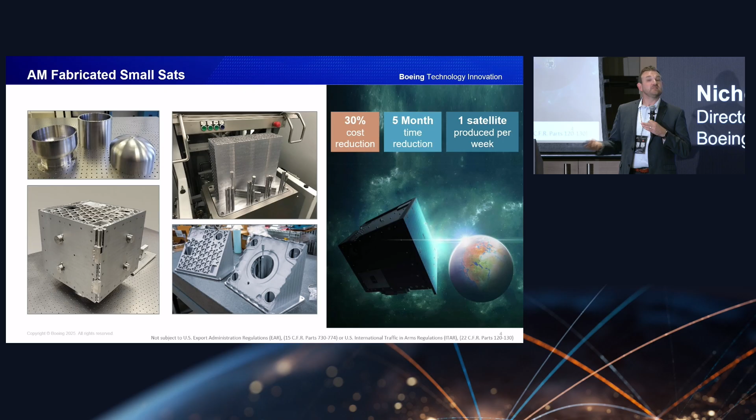And building on this success across different areas of the business, we want to continue to use the technology, and it's going to vary by business unit. This is a very specific set of needs enabled a product line. On the defense side, you have sustainability issues you need to solve and resolve from spares and repairs. And similarly on commercial, we have a broad portfolio where we're trying to adopt additive.

So an example now on, call it a spare and repair side. This is an exciting project. It's been ongoing. It's an F/A-18 landing gear bell crank. When you hear landing gear, the criticality is increased. It's an important application. We partnered with NAVAIR from day one just to go through our process beginning to end. Understand how we develop a process, how we qualify a powder, how we qualify a machine, how we generate data to say it's aerospace ready and it's meeting requirements.

This particular material was, it's really replacing a long lead forging, and it's using a high strength aluminum material that we developed that not only just fits the requirements of this part, but also has inherent corrosion resistance improvement. So it has a 50x improvement on corrosion. So it's really, from a performance standpoint, we're hitting all the technical airworthiness requirements.

So last year we had a fit check at an air station just to prove out the concept, and continuing to drive forward these types of applications where it's no longer a technical issue. We can meet requirements, we have stable processes. But how we drive value into these programs by building confidence to the end users, working with our regulators on detailed reviews on maturity so that we can really solve some of these needs.

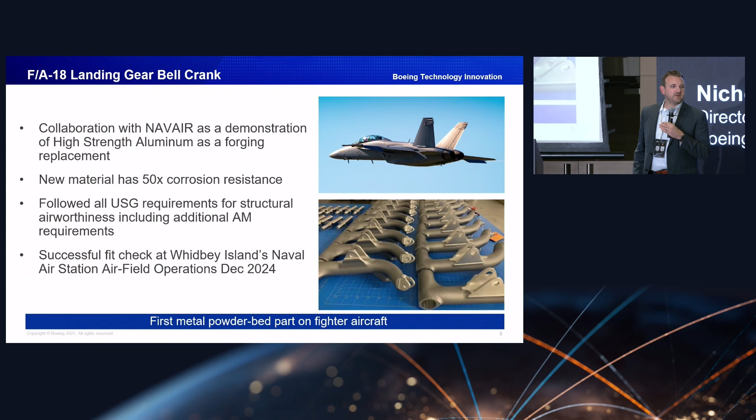So I kind of highlighted this a bit and from the sheer volume over the years, but as we're starting to scale additive now, we're going from tens to hundreds to thousands a year. What we really need to do is take a very complex interdependent process. Many variables for powder bed, easily can be over 100 variables that you have to lock down and control, especially in aerospace, aerospace mindset. Without those understood and locked in, you're not demonstrating a repeatable, reliable process, which is foundation for any regulator.

You can demonstrate repeatability in your process. So the key to scaling and developing a supply chain is a digital thread technology and system behind it, as well as a model and a supply chain to help us scale in the ways that we think we need to be successful.

So one aspect of that is developing a digital thread. That's where we're looking at a number of activities. One, beginning to end, all of the engineering data, all the manufacturing data, all the inspection data that you might need is developing a back-end infrastructure to store that. So what that has meant is we have developed an entire data architecture where we've automated our machines, connected them to a central database, integrated them with engineering and manufacturing systems. So you have data that has context. So you have a giant structured data set, and that can scale.

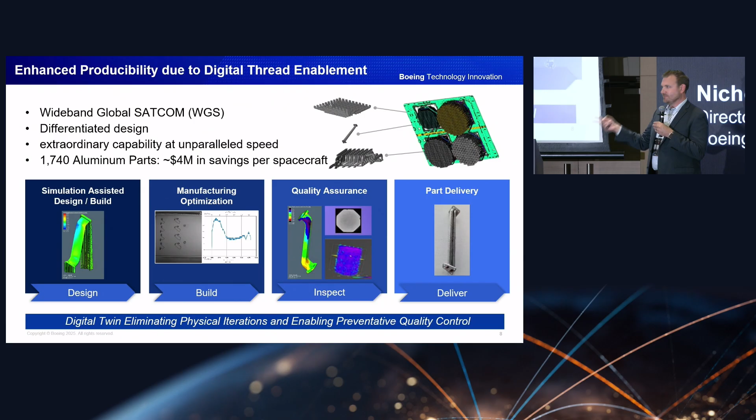Integrating machine data with inspection data and integrating it all together in one reference frame. My machine did one change here. Did it show up on inspection data? Structured data lets you do all this. So the back end is helping us scale.

And so we look at build file development and the design for additive as upfront engineering. You want to lock down your build file, your orientation, your configuration, all the developed parameters, and just lock it down, and then encrypt it, send it to a qualified printer. Now that printer can be anywhere around the world where it's needed. And you're limiting opportunity for variability by doing so.

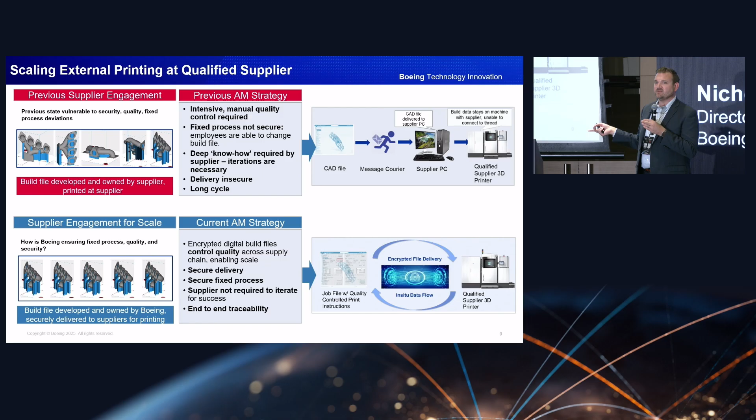All right, so you physically have a site with all the equipment. You have the ability to send it encrypted and get data back, and that's a key functionality we have, where now the data is connecting back to your digital thread. So you have a fleet of machines across the world. They're all fully connected, and you're able to integrate that in one central database, which is really an enabling piece for us to scale at quality, where you have these complex processes.

So when you're looking at that kind of complexity here, and what does that mean in the future, where we are today, and just maybe to highlight this as I wrap up my thoughts for the next session, right now we know how to qualify parts today. We have certain standards across the industry. We have very proven methods, whether it's with the DoD or the FAA, where data needs to be presented and them accepting it. The digital thread helps us scale because the data is available and accessible.

Something I have to juggle is we have to meet regulations today with data, but we also want to develop new methods of the future so we can be more efficient as we scale. So part of the enabler for the digital thread is being able to develop more complex ways of qualifying parts, where there's a lot of excellent research in the community here and also at large to advance laser controls in your machine, being able to do feedback loops to be able to control a machine using novel algorithms.

We're using machine learning and AI to control the systems. All very important work, but it has to be in the construct of how are you going to certify that part in an aerospace environment.

So the digital thread in our distributed model will help us scale with proven methods today for qualification. But keep in mind, there's future ways that we need to keep working together to scale further and more efficiently. And we have to keep working both solutions. Yeah, we know it works today, but we have to keep our eye on the future and how to do it.

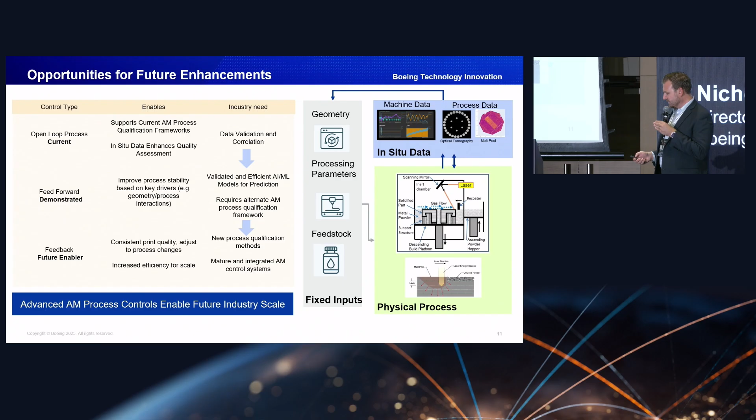So, I think with that, I just wanted to say thank you all for the opportunity. And really, I think what we're at as an industry is an inflection point, as I said, scaling up in production, and how do we leverage modern digital tools, secure transmission, digital technologies to help scale additive to the next level where we're trying to go.

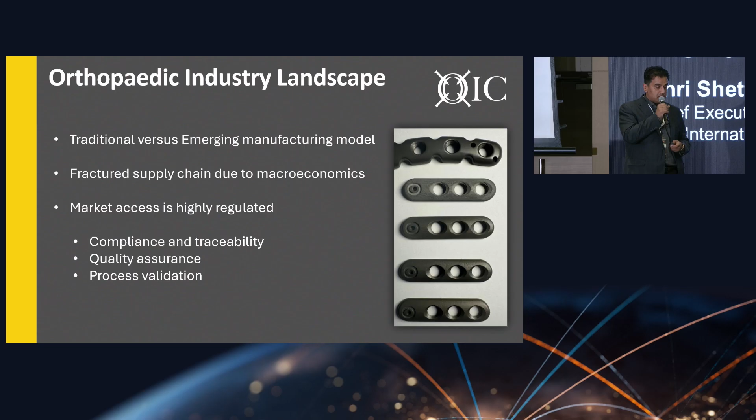The impact of additive manufacturing is that, like my previous speaker at Boeing said, you can take things that are done by 10 different vendors with different steps and integrate them in one 3D printing step that lets you replace large casting houses, large post-processing houses in Asia with a digital factory that has a much smaller footprint, and that helps you reduce costs exponentially.

So, as many of you know, the main advantage of additive manufacturing is threefold. One is the localization aspect. It is almost impossible for many countries in the world, like Indonesia and India, to put large casting houses there. They just don't have the space to do it. It's easier to put a digital factory in country.

The second is cost. Today, a lot of cost in building parts does not exist in the manufacturing itself. A lot of cost is actually in the shipping, in the inventory, in the tariffs. So if you can have a factory close to the source that is using the products, you can exponentially bring down the price, and the only way to do that is with digital manufacturing using 3D printing.

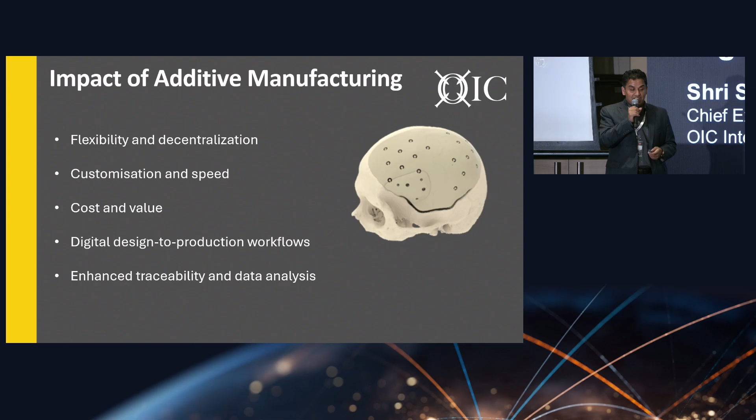The third thing is customization. You can take devices that are historically designed for different anatomies and convert them to have better fit in different regional body types. Today, it is a well-known fact that in the West, surgical procedures have really good outcomes, but when you take those devices and put them in patients in Indonesia and India, the revision surgeries, the infections, the fit issues are huge. And using 3D printing to make better fitting devices at lower price is the only way to tackle this huge problem.

So if you look at the supply chain for a medical device, from an idea all the way to a product that goes in the human body, there are maybe 20, 25 steps. And this is done by many, many vendors in the chain. At OIC, we integrate all these steps on a common platform, and by partnering with local healthcare partners, we bring it into countries. And by having this ecosystem local in Indonesia, in Singapore, in India, we are able to create the next generation of medical devices that have not been possible in the past.

Because historically, medical devices were created in the West and sold in the East. By bringing this innovation, manufacturing, development, and regulatory platform in the region, we are able to have local products created for the local population, which is very critical as the population starts aging and growing in the developing countries.

AI plays a pretty significant role in this as well. Historically, designing products has been a pretty complex and long process. It could take you anywhere from 1 month to 6 months to design a product. A lot of the AI tools help you cut the time down and help you get designs that are much more robust than anything that you could make in the past. The second thing is modeling and simulation.

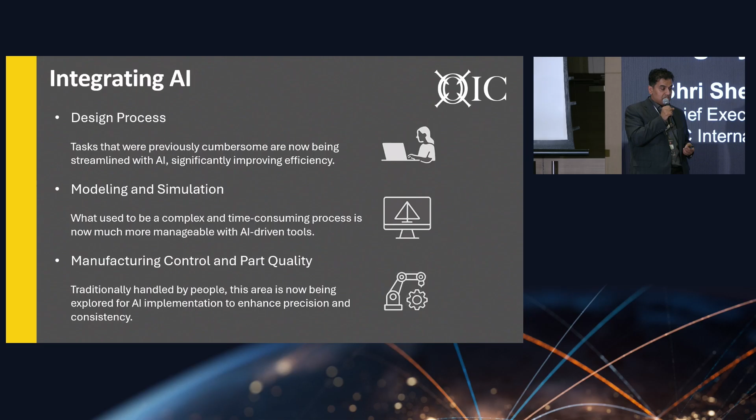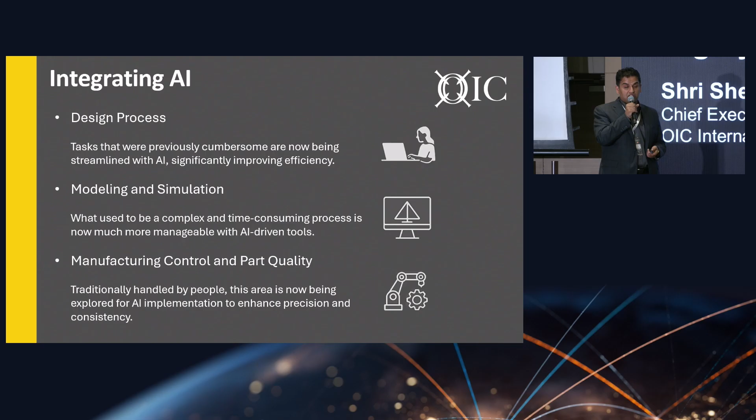And the last thing is manufacturing control. Historically, the methods used in traditional manufacturing have got to do with SPC charts, creating, looking at data, and trying to figure out how to build these parts correctly. AI helps you do this a lot more effectively, which in turn leads to higher yields and lower price. So you can get better design products, better fitting products, stronger products with much higher yields and lower cost by combining digital technologies with AI.

So in my last slide, I'll say that it is very, very critical that orthopedics goes a certain way because it's one of the basic needs of the developing countries. And we need to think about these models differently than we have in the last 50 years. So basically, I say data-driven manufacturing technologies, putting manufacturing capacity in country for local demand, personalized implants that historically were not available for cancer patients, for spine patients,

having healthcare equity through innovation, and finally, Singapore will play a key role because a lot of the countries that we are targeting, where there are large geographies, 300 million people in Indonesia, 1.2 billion people in India, they are all around Singapore. Using Singapore as a hub to do technology development, to help innovate into these developing countries is very critical. And this is a journey that OIC was created on.

This is a journey that we've been on in the last 7 years, and it is just the beginning. I think it's a critical need, and hopefully between technology, partnerships, and people, we get there and try and make a small change in this big problem.

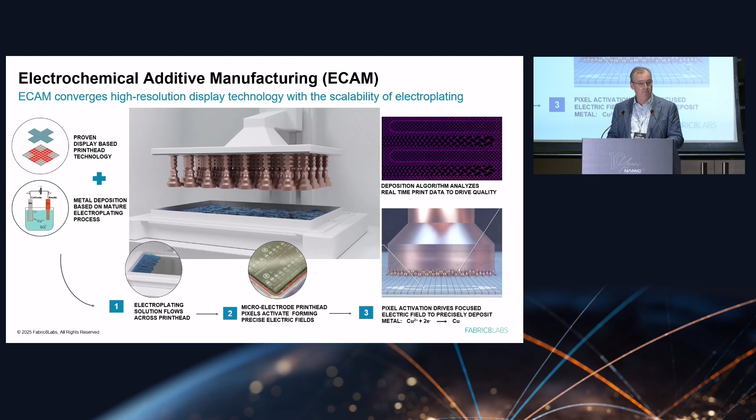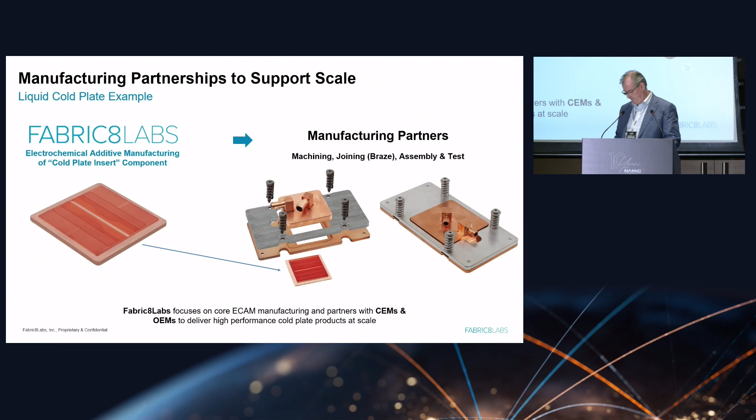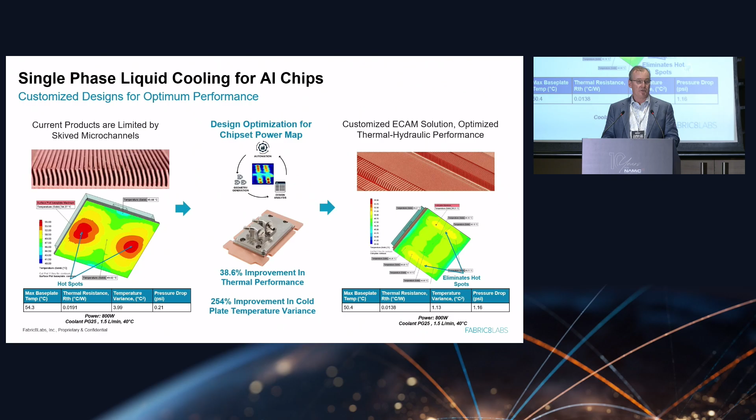Unfortunately, most dies in the AI world, most chips, have a very complex power map. And so you have those red circles you'll see there, those are hotspots. And so you've got a very consistent cooling, but you've got hotspots, and that's problematic for these devices. On the right-hand side, if you look at our component, the variable fin density, we can use generative design to create a cold plate insert that actually reduces the statistical variance across the device. In fact, we can improve statistical variance of temperature by almost 250%, and we can improve the overall thermal performance by almost 40%. So it's a significant benefit to our customers. That's why you'd introduce a tech like ECAM.

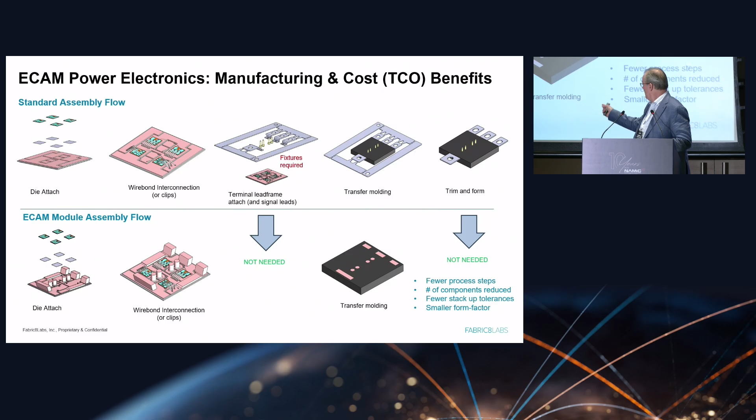Contrast that with our process. So you start with a die attach on a substrate that has already got many of the components already printed on it. So you're already simplifying the process. You do wire bonding and go straight to transfer molding. So you've got a component that uses fewer process steps, fewer components, and actually takes up less room, which is a benefit to board designers. So again, we're simplifying the supply chain here.

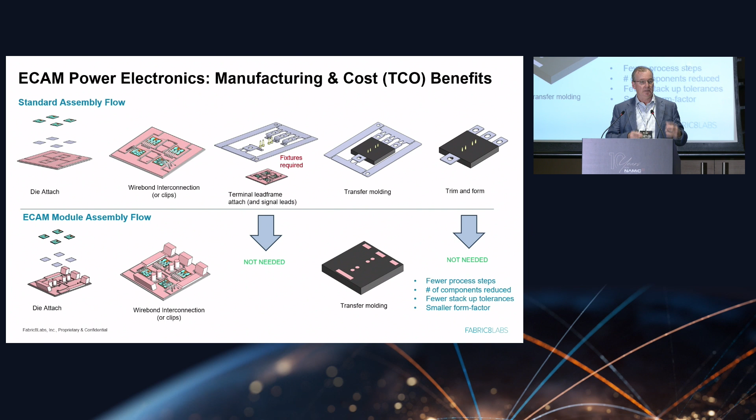So typically, when you manufacture these components, you have to take each one of those elements of the device, and you've got to discretely manufacture them and then solder them to a circuit board. With ECAM, we can actually print directly to the circuit board. So we eliminate that entire process altogether. Okay, so we're again simplifying that supply chain, but there's an added benefit too. Because we can print so precisely, we're actually able to improve the performance dramatically for these components.

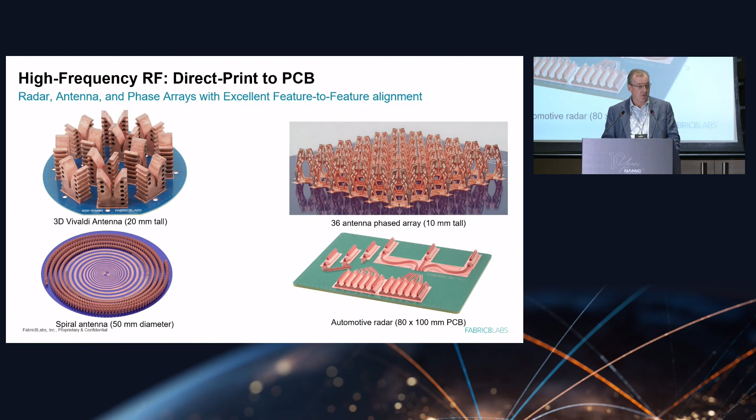Compare that to the ECAM-based process. We start with the same copper ore. In fact, we make our plating solution with scrap copper, copper oxide. And that goes right into the printer, and out of the printer comes a finished component. No post-processing, no depowdering, no sintering, and we're done. In fact, we had an analysis run several years ago that declared that our components were at a 95% lower carbon footprint than laser powder bed fusion, and about 91% lower footprint than binder jet. And it's due mostly to the lack of sintering and a lack of atomization for the powders as well. So again, another supply chain improvement overall.

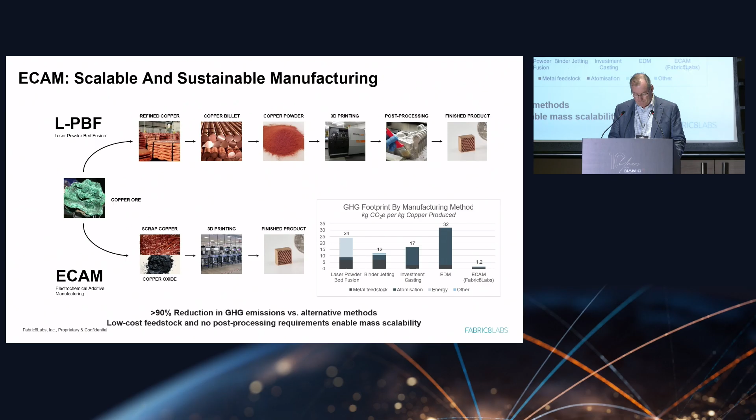So in summary, what is the outlook for ECAM? We've developed this process. It minimizes the supply chain risk, making it easier to introduce a new technology by leveraging the existing supply chain for our customers. It improves performance for the components that we manufacture. It reduces the component count and process steps, and also reduces the carbon footprint.

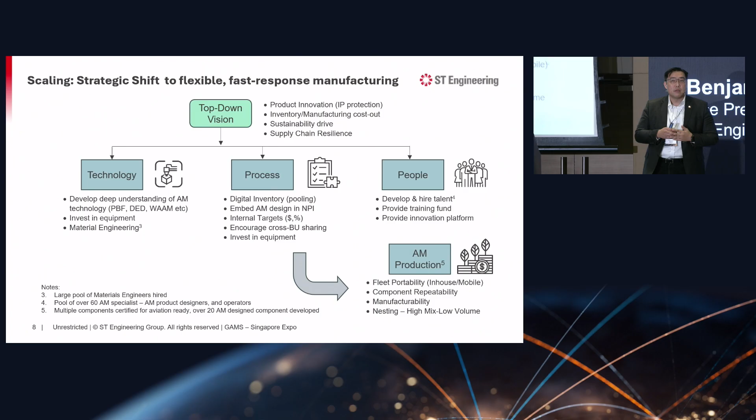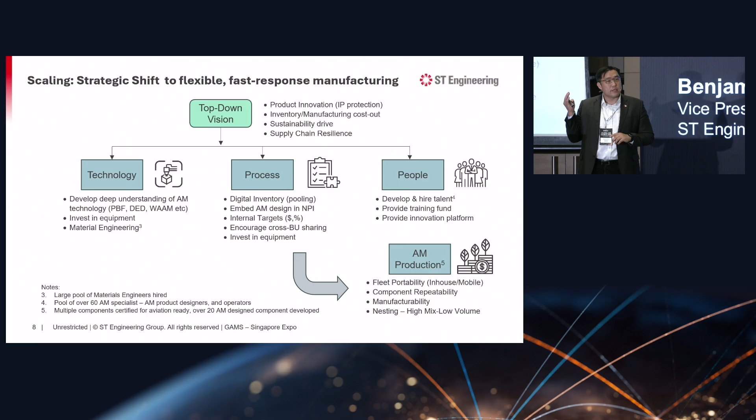They have service overhaul every 6 months at different sites. You can move this mobile unit to the different sites to service all these different plants. And that's the model that we're using today, and we're addressing in the next couple of years with our customers. Today, we are already supplying a mobile unit to the military to support their outfield exercises as a prototype. We hope to do more in order to support our military out in the field.

The capabilities we have in-house today are not limited to powder bed. We have a lot of FDMs, we have a lot of polymer machines, and it's all within certified processes. As I mentioned, within aerospace, we have very stringent requirements for CAAS and EASA as well, and we have some of the qualifications to produce some of the parts that go on the Boeing airplane and the like.

And we're happy to say that Singapore is ready. Yes, it was developed in the HQ in the US and Europe, but Singapore is ready in terms of capability to reprint these parts at high quality. The aim for Singapore, in my mind, to be an advanced manufacturing hub in the light of our semicon industry is not to develop low-cost solutions. We want to provide high-end advanced solutions that only Singapore can provide, that will give us that niche to compete against low-cost China and low-cost India.

So when you come to us, we want to develop AM solutions and complex components that give you extra performance and not fight with the low-end cheap replacements, essentially. So we want to offer the extra value add in terms of design optimization. We want to provide integrated 300 parts into a 4-part module for you, and not replace the nuts and bolts and screws and impellers that you might require.